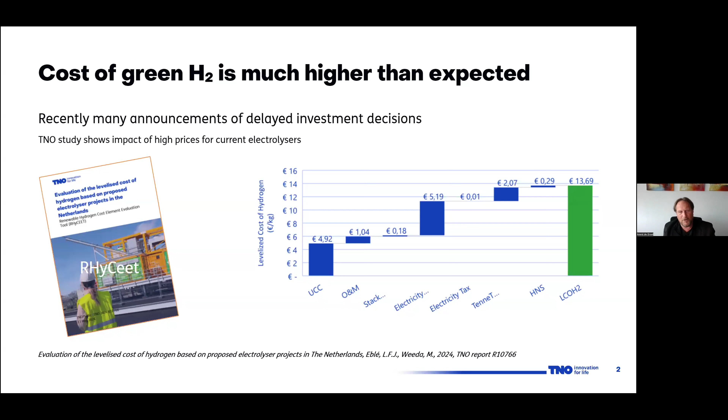But to show the state of affairs, our colleagues at TNO in our Amsterdam department prepared an evaluation of actual cost of projects which are being executed and planned in the Netherlands. They got a lot of confidential data, and based on those data they put together what the cost of hydrogen would be. Of course, these are piloting and demonstration systems, so it's not the real stuff yet. But what it shows is that the cost of hydrogen from the current piloting is almost an order of magnitude higher than we're targeting. By the way, this is a public report which you can download. I put the name of the report there.

I talk about the potential to increase the performance and reduce the cost of electrolyzers. Specifically, I will discuss PEM electrolyzers, but in general the story that I tell is representative also for the other technologies. For the sake of simplicity, I will focus on a single technology. I will discuss what is necessary to bring down the cost of the electrolyzers, but also what the challenges are in getting innovations to the market, so getting them from the lab to real implementations. I'll discuss some of the key innovations which will help improve the PEM electrolyzer. And I'll give one example of an innovation to show how important the system engineering approach is in assessing how to implement the innovations.

By the way, I work in Petten, in the part of TNO, the Dutch Applied Research Organization, with indeed almost 50 colleagues on different electrolysis technologies. Now, one of the questions we often get is: but electrolysis is a mature technology, there are electrolyzers in the market. And to illustrate that, before I go into the cost reduction, let me show what we call the concept of electrolyzer generations.

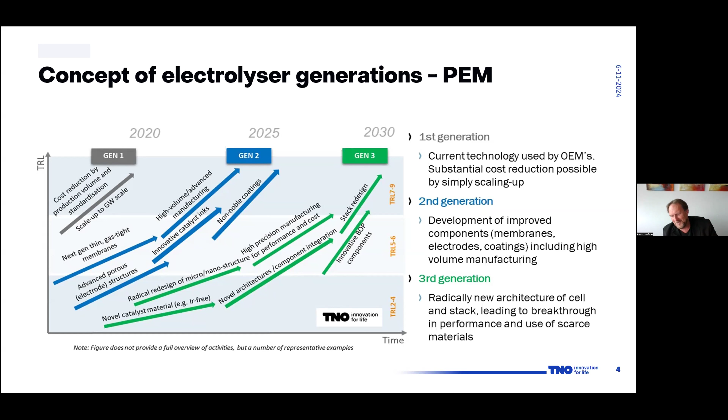And we consider a third generation, which has really a radical redesign of the electrolyzer, the components, the nanostructures, etc. So that gives you a bit of a flavor. Yes, it's a high TRL technology, but if we're talking about the next generations, there's still quite a lot to be gained.

Looking specifically at the cost, there's a need to go to lower cost, but there's also quite some possibilities. Two, let's say, technology factors are producing electrolyzers at a much higher volume and standardizing components. That will certainly lead to cost reduction. That's also one of the steps in the first and second generation, and there's all kind of technology breakthroughs which we can use to reduce the cost.

I also explicitly put risk reduction over the supply chain, and I will use the next sheets to illustrate how risk is adding to the cost of green hydrogen at this moment. If you now look at the manufacture of components, there's very limited manufacturing at scale, because taking the risk to invest in that scale at this moment is difficult. If we look at the component level, what you see is, for example, that in PEM electrolyzers, quite high loadings of critical raw materials are used, just to be sure that they can supply the lifetime.

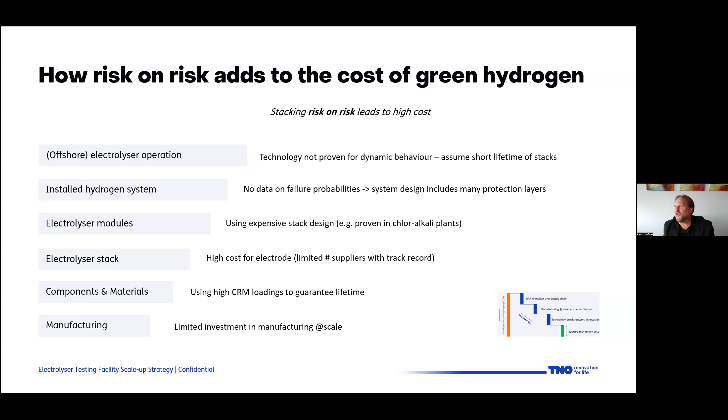If you look at, again, the electrolyzer stack manufacturer, he will buy an electrode which may not be the cheapest, but which has a good track record. And there's limited suppliers, and they have invested a lot in developing those electrodes. So those electrodes will also include a risk factor.

Same happens on the level of an electrolyzer stack. What you see is, for example, that ThyssenKrupp is doing quite well, because they have a stack which has been validated extensively in the chloralkali technology. It's not the cheapest design, but it has been validated.

Well, to cut that short, on every level of this supply chain, from the manufacturing technology to the operation of the system, there are risks, and all those risks accumulatively lead to very high cost at the moment. They are an important explanation of why the capex costs are so high at this moment.

The positive side is that there are in every level enough innovations which can improve the performance and reduce the cost. From roll-to-roll manufacturing, innovative designs of electrodes, innovative designs of electrolyzers. We can reduce the plant complexity if we have more information about the safety of systems. So on every level, there are a lot of innovations which can reduce the cost and improve the performance.

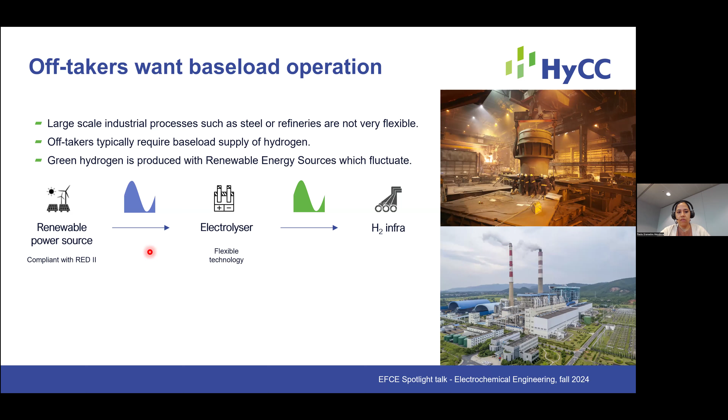So looking also from the off-taker perspective, when we see, for example, these hard-to-abate industries, what kind of processes they have. These large-scale industrial processes are not always very flexible. So the off-takers typically require a baseload supply for hydrogen.

And green hydrogen, as you know, is produced from renewable sources. So if it needs to be compliant with RED 2, and that fluctuates, electrolyzer technologies can be very flexible. However, the off-taker wants baseload. So, of course, ways to solve that are either storing energy when it makes sense, or storing hydrogen locally, which is sometimes a challenge, or in, for example, underground storage facilities. And development of all the infrastructure around it also takes time, and is not an easy task.

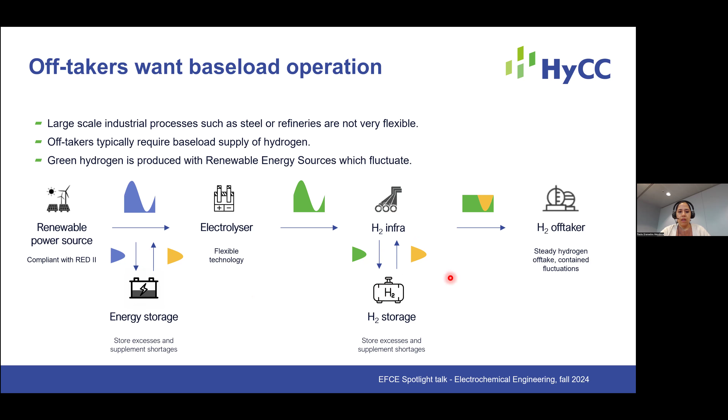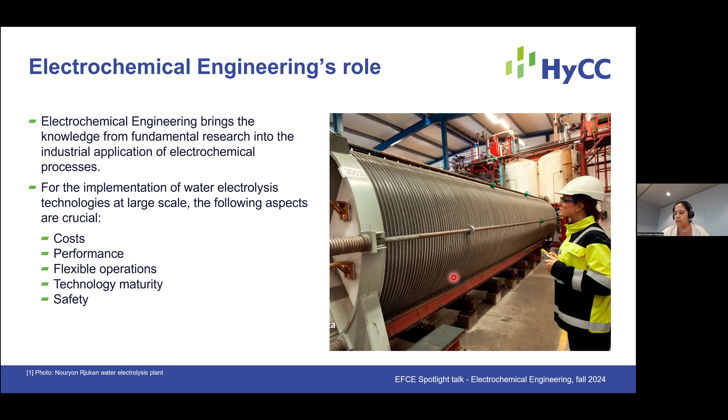So when we zoom out again and look at the challenges from the off-taker's perspective, I see that electrochemical engineers play an important role. What electrochemical engineering brings is basically the knowledge from fundamental research into the industrial application of those electrochemical processes. And for water electrolysis, typical things we need to consider are costs, performance, flexible operations, maturity of the technology, and also safety. So I'm going to touch upon these topics, and I want to start first with the costs.

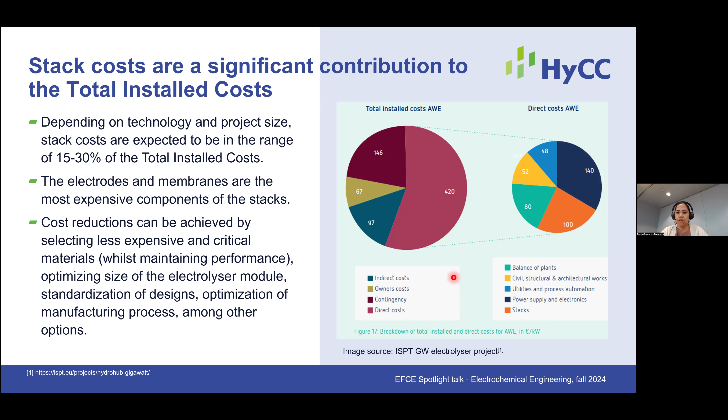When I look at the total installed costs, I think it's important to reflect that they are not only the equipment costs, but also other costs such as civil, engineering or contingencies. Also depending on the technology and the project size, when we look at the contribution of the stack cost, for example in this alkaline design, you can see it is about 15 to 30% of the total installed cost. So these are significant contributions.

Electrodes and membranes are the most expensive components of the stacks, and cost reductions can be achieved by selecting less expensive or less critical materials. The challenge is also to maintain the performance. We can optimize the size of the electrolyzer module. Standardization of designs is also very important. Replicate as much as possible. Optimization of the manufacturing processes, among other options, of course.

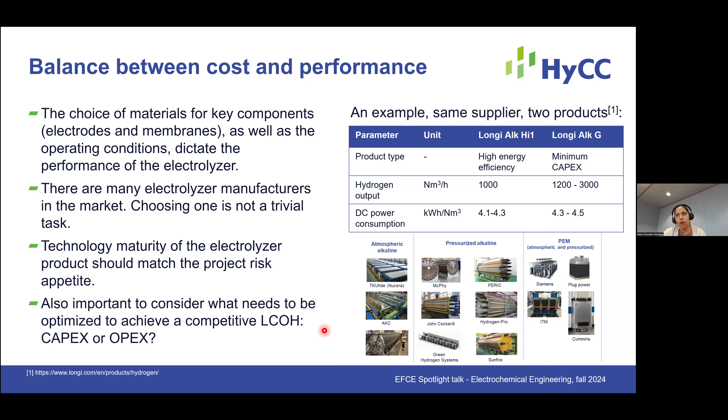I think it really depends on the conditions that you have for a project in general. And I think also one of the key aspects is that the technology maturity of the particular electrolyzer product needs to match the project risk appetite. And what I mean by that is that maybe there are new technologies that are perhaps not thoroughly tested, or not to the scale that one would like, but they are very competitive. So if a project can take a higher risk, then it will also make sense to investigate those options.

Whereas, for example, if in a particular project you really want to minimize and reduce the technology risks as much as possible, you probably choose a more mature technology.

Now, when we look at the requirements from the RED II directive, green hydrogen is to follow the renewable energy sources profiles on an hourly basis. And what that means is, so I have here an example of a wind profile, that the electrolyzer needs to follow that load. And one of the aspects, for example, on the design and on the operations is that the electrolyzer has a certain minimum load, a threshold at which the electrolyzer can operate safely.

And here there are two examples. So, for example, a stack that can operate only until 40%, at this point we'll have a shutdown. Maybe if it can operate at lower loads, then the shutdowns will be a bit less. And of course, shutdowns will also depend on how long the load will stay under those conditions. And the effects of this shutdown of the electrolyzers are not always well understood with respect to, for example, degradation,

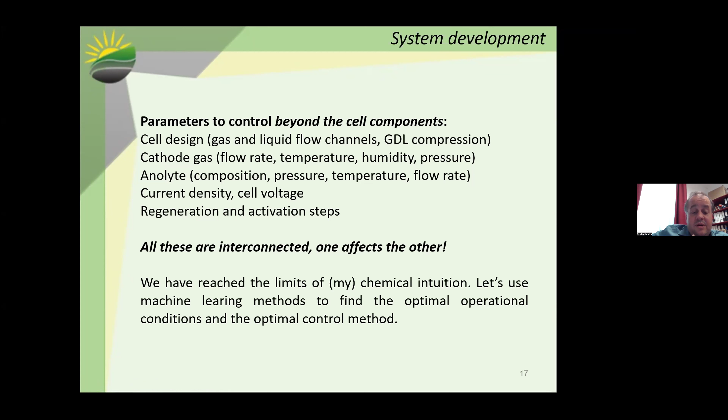So we teamed up with a group working on machine learning to find the optimal operational conditions for these systems. And so they came to us and asked how much data we have. And then we told them, then they started to laugh. I told them there is nothing funny going on, and I want to work on this. And then they said that we should generate more data. So we started to build up these automated test stations.

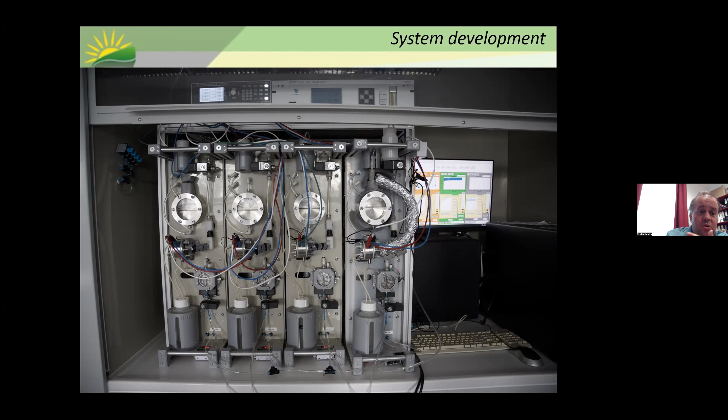And this was the first generation where we had 4 cells next to each other, working completely independently. And we can change all the operational parameters on this. And so what we do here is that with different operational parameters, we gather experimental data, we filter it, remove some outlier points, process it, and then we get a data set.

How this works, we vary basically parameters like current, gas humidification, cell temperature, CO2 flow rate, and the anolyte concentration. And by trying different combinations, we check the output parameters, which are the cell voltage, selectivity, single pass conversion, and these kinds of parameters. And we built a model, a neural network based model. But before I get to that, I just show that we vary all these parameters systematically and then define protocols having these parameters varied in the range where we want to study it.

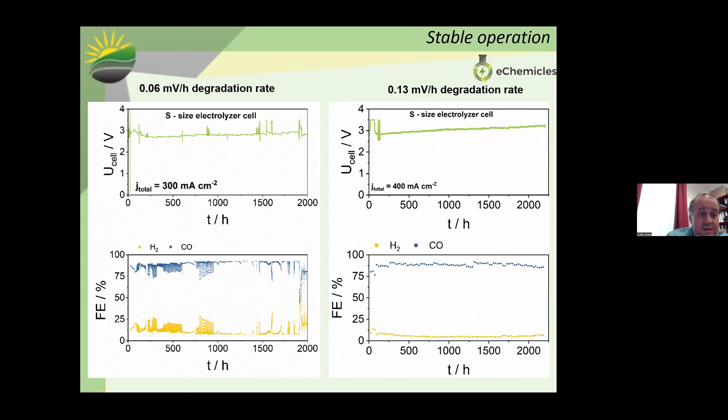And also by optimizing this, we can now routinely run these cells for thousands of hours. And that way we can determine degradation rates. And I know for people coming from the hydrogen community, these numbers look high. They are about 5 to 10 times higher than what you expect from, let's say, a PEM water electrolyzer. But I have to tell that 3 years ago, we were an order of magnitude higher than these, and we are improving rapidly, and we see where we can improve this further. And we have really good hopes to get to those numbers which are expected for durable operation.

One thing which is important also to mention, as was mentioned before, is that intermittent operation and dynamic operation is important. Although most of the end users downstream, both for hydrogen and CO, need 24/7 operation, it's good to have the opportunity at least to operate in a dynamic way.

And I see Michele, so I will wrap up quickly.

A few words about eChemicles, the company we started 2 years ago to translate these results, these proof of concept results to the market. And so we did scale up from the 8 square centimeter through 100 square centimeter to this 2,500 square centimeter single cell. Now we have this stack with 18 cells in the stack. This is how it looks like.

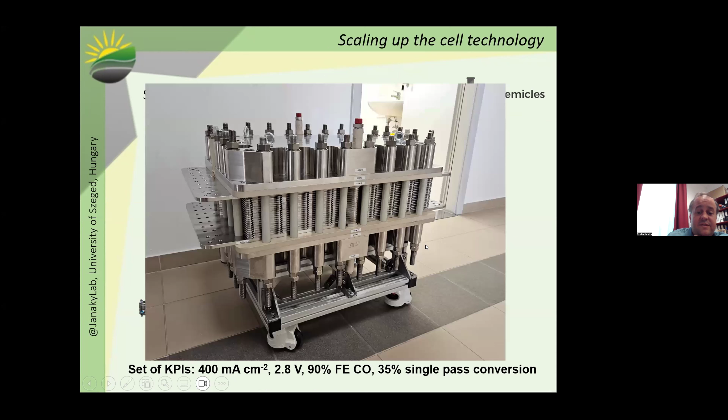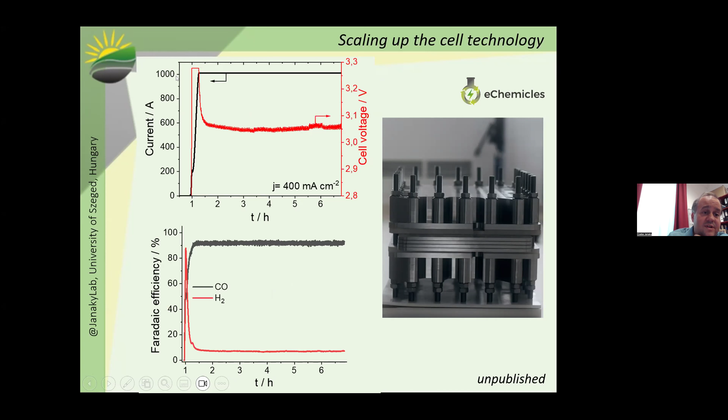These are the KPIs we are targeting with this system. And actually we are very close to getting it. It's over 92% Faraday efficiency for CO. We are around 3 volts cell voltage. You can already see that you have 1,000 amps going into this stack. So this is already quite something.

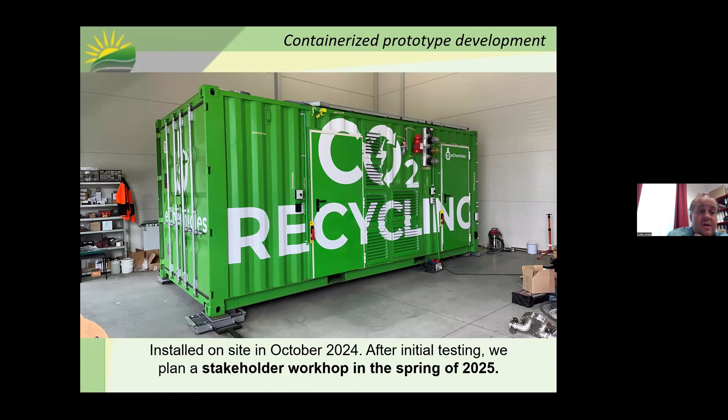And we have our first prototype container shipped to our site actually last month. Commissioning is ongoing, and the message here for the community is that next spring in April or May we'll have a stakeholder workshop for CO2 electrolysis when we'll show our container in operation on our site.

And to conclude with, same slide which I started with, I think it's very important to highlight that professionals throughout this value chain need to cooperate in order to bring technologies to the market.

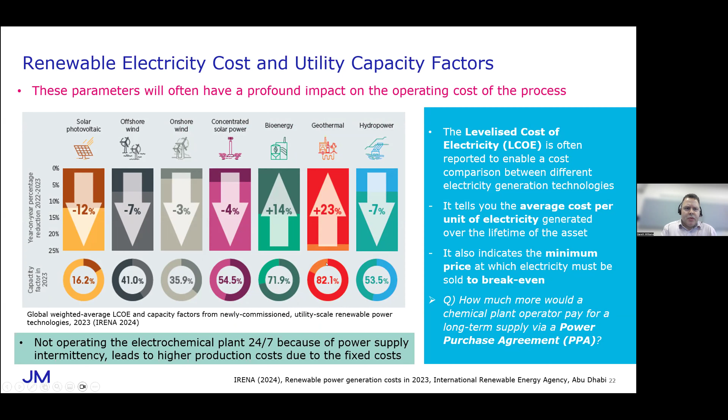So these parameters often have a profound effect on operating costs of the process. As I say, renewable energy is generally coming down, but it's quoted as the levelized cost, and that's an average of the electricity cost per unit over the lifetime of the utility. So it indicates the minimum price at which electricity needs to be sold to break even.

So my question is always, how much would a chemical plant operator pay for a long-term supply, 10, 15, 20 years, via a power purchase agreement? How much more would that be than the levelized cost? And in terms of the capacity factor, not operating your electrochemical plant 24/7 because of power supply intermittency will lead to higher production costs due to the fixed costs.

So just some final thoughts now, to wrap up. Johnson Matthey provides technologies for decarbonising the production of chemicals and fuels, including e-fuels and e-chemicals. At our technology centre, we're looking at CO2 electroreduction in collaborative projects, focusing on the development of the critical electrolyzer components, electrocatalysts, the CCMs.

And lastly, I think engineering considerations reflect both the electrolyzer and the whole process flow sheet, and it's prudent to look at the economics early on, with a view to homing in on a viable business case and profitability.